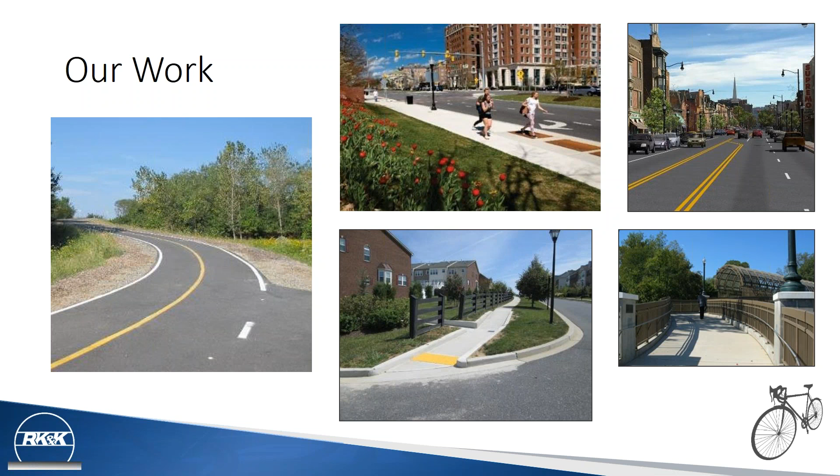So today I put together an agenda where we'll go over some general considerations, what we're looking at as we're planning and designing these bike facilities. We'll discuss some of the trends as we're planning for cyclists. Then we'll go through some design guidance and some examples so we can discuss lessons learned. And then I'll highlight several keys to success that, from my own personal experience, I wanted to share with you today, so you can reflect on those in your practice wherever you may be throughout the Commonwealth.

So first we'll talk about some general considerations. The relevance of this topic can't be overstated. Bike planning is an incredibly popular area of practice. It's one of the areas where we see a lot of interest in design. We're not building as many roads. We are building more trails, cycle tracks, and so forth. So those facilities provide for general interests of our community.

So active transportation, alternatives. These facilities allow us to enhance transit, expand the reach that transit is serving our communities. It provides environmental benefits because it is an alternative for transportation. So people might decide they're not going to take their car, but they'll go out on a bike.

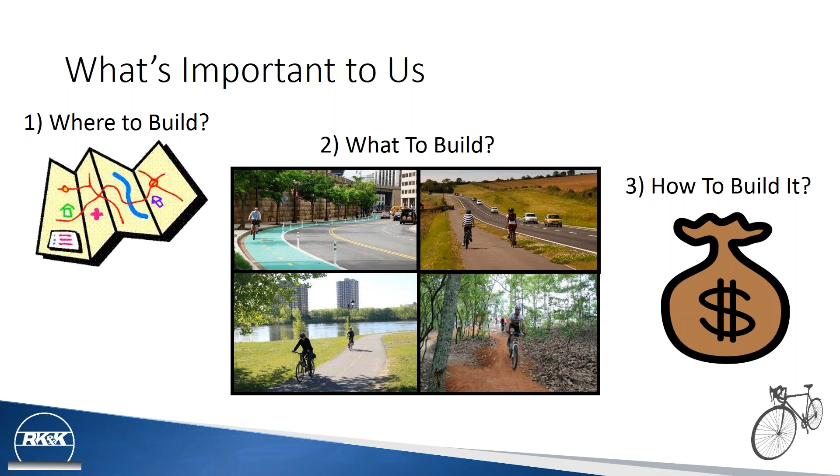Why is this topic important to us? As we're planning and designing these facilities, it's important that we think about where we're going to build, and we also think about what we're going to build and how we're going to build it. At the end of the day, that really boils down to what's the bottom line. How are we going to finance these projects? Because despite having the best plans and knowing exactly what we're going to build, we do have to make sure that there's adequate money to construct these facilities and then ultimately to maintain those. So we'll cover some aspects of this throughout the presentation.

Who's our audience? Who are we working to serve? So that's a variety of folks. We know that our direct impact is going to be the cyclists who are out there riding on these facilities. But there are also indirect impacts, and we need to keep that in mind as we're working on bike projects. So that includes property owners, the people who may be impacted because a new facility is located adjacent to or on their property if we need right-of-way. We've also got road users who are going to be around these cyclists, so we need to keep their expectations in mind.

There are businesses, so these facilities may serve businesses. They may provide accessibility so people can go out and shop at businesses or even commute to an office. And then another consideration is tourism. Cycle tourism is a field that we recognize a lot of folks practice, and it's emerging as an area of interest to capture cyclists in your community.

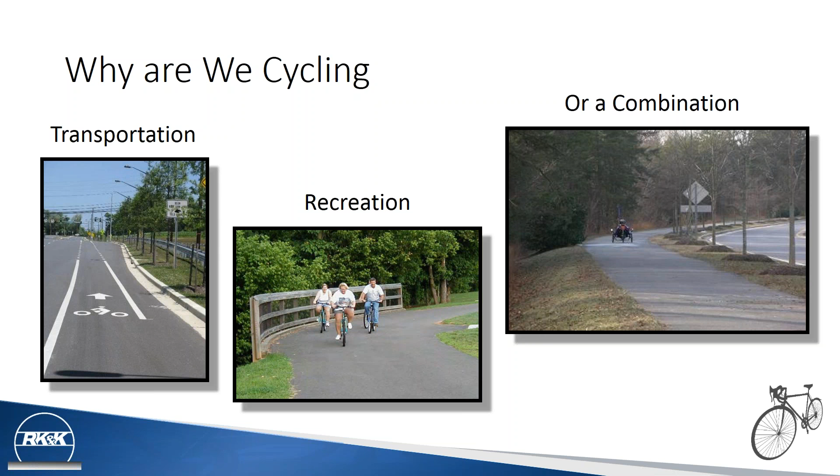But the facilities, whether transportation or recreational, may serve a combination of benefits. So it's really important to think about who you are trying to serve as you're planning a new facility. Is it going to serve a transportation purpose where it's more direct? Is it recreational where it may just be for somebody to go out and enjoy? Or do we need to make sure that we meet those combined needs? So that's something to keep in mind.

Now, in terms of mode share, we know from recent research that roughly half of our bike trips are recreational. That number has been decreasing a little bit over the last 10 years or so. And we see that commute trips are a small percentage of our overall cycling trips, but that number has been growing. And we can also see in terms of the increases in cycling that it's becoming more utilitarian.

So people are getting on their bikes so they can ride to shop or go do something other than just a recreational purpose: commuting to work, shopping, visiting businesses, that sort of thing. So as people are out there biking more, we're trying to meet their needs, get them where they need to go.

Then you've got the enthusiastic, confident rider who is generally also going to be out on the roads. They're generally going to ride regardless of conditions. They may be a little bit more apprehensive about the most challenging environments, but they're still going to be out on the road. They make up a small percentage, less than 10% of our overall bike users. And for as long as we have been designing and planning facilities, that's the group that's generally been catered to from the engineering perspective.

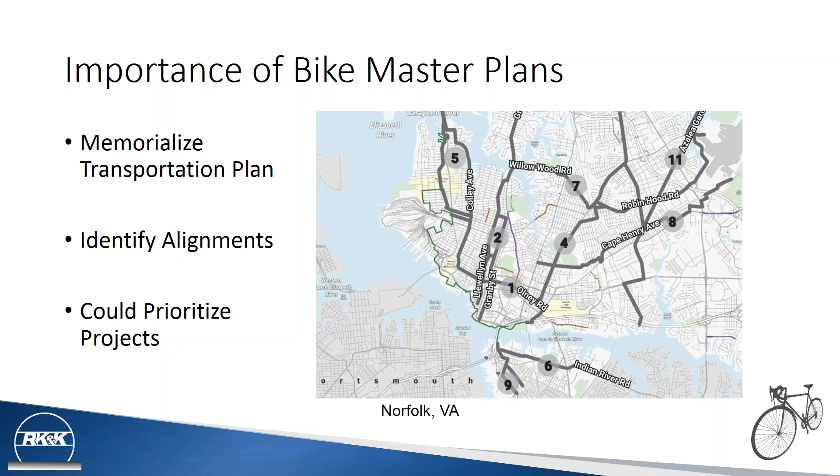So the example here from Norfolk, it includes a number of alignments and where those alignments could be developed. So having that plan helps Norfolk determine what it is they're going to build. They can use the plan to prioritize when projects should move forward. So those are critical considerations, and we'll touch on this a little bit more in just a bit.

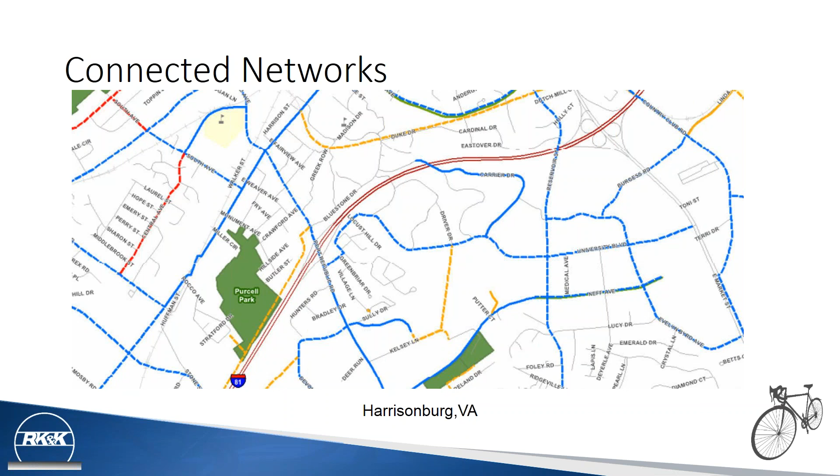Another important theme that we're discussing a lot in the bike planning community is connected networks. So we all recognize that these lines on our master plans don't just build themselves. So we have these segments that are existing, but we've got a lot of pieces of the puzzle that don't connect. And so what we say essentially when we're developing these plans, it's like we're saying to our cyclists, when they're going from an existing facility to another and it's connected by a dashed line, that's like saying good luck. But the goal is that we fill in these gaps, and we want to prioritize those missing links to make it easier for people to connect their route, to make it safer.

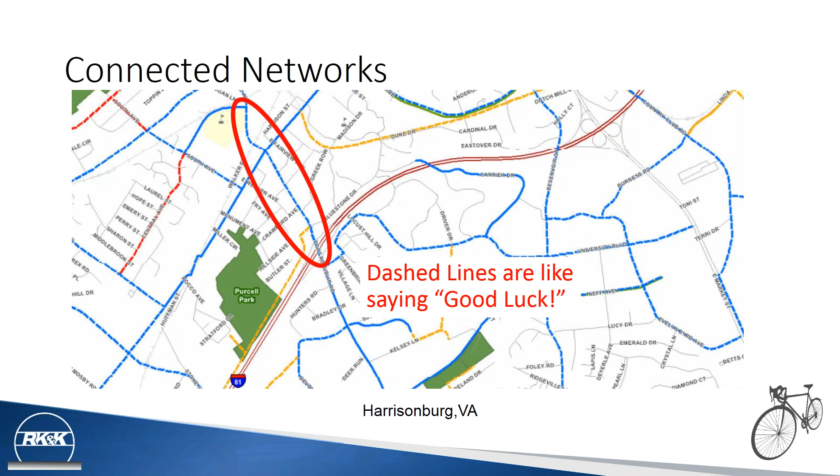The example here from Harrisonburg, as far as I could tell, these bike lanes that I've circled have been constructed. So now if you want to ride from one point to the other along those two solid lines, the dashed line in between has been connected. So that's a theme that we're not trying to have little bits and pieces that are disconnected throughout our communities. We want to actually create a network. We're seeing that in some communities where they come into a downtown and they do 5 or 6 projects on a network basis, and those projects are on the ground all at the same time. So connected networks is a big theme that we're hearing.

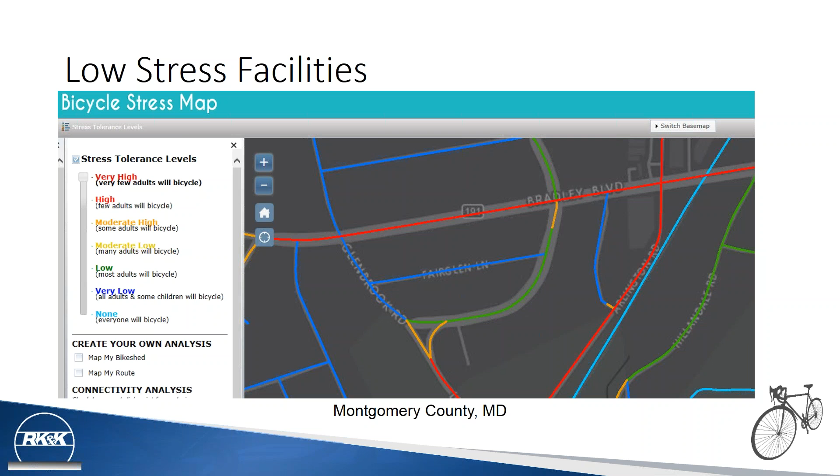Another theme that we hear a lot about is safety and security, and if you've worked on bike projects, you've definitely heard that concern raised at some point. Some considerations that we hear about: lighting. Lighting is a big issue in terms of security. We want to make sure that you can see at night. It makes it more accessible.

It's more of a transportation type of component of a project. So whenever we're doing a transportation bike facility, we're looking at including lighting. It is a very expensive facility, so that is a consideration that you have to have as you're planning that facility to include lighting and be a 24/7 transportation link.

Other factors that people might look at are cameras, maybe some patrols, either police or volunteer, and then including mile markers is a very valuable tool to riders because it allows them to identify their location if they need to call in the event of an emergency. It also might make a good meeting point for people as they're out on the trail to say, I'll meet you at mile marker 50, and so it's another good asset to include.

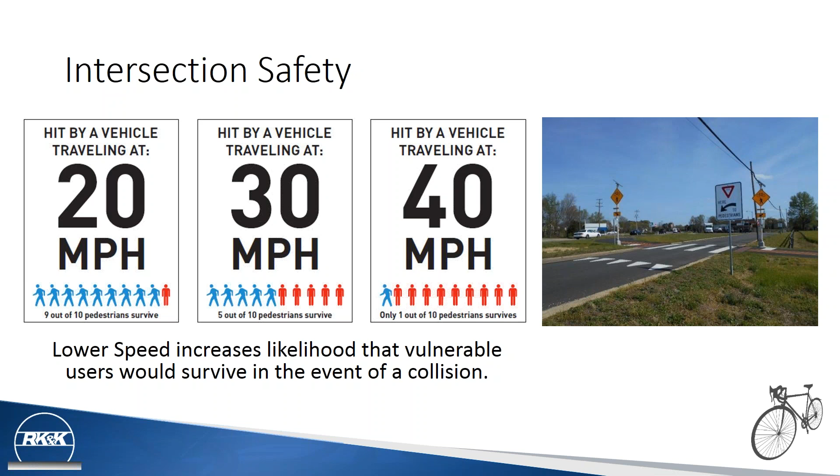So our goal is anywhere that we are intersecting with an existing road, we want to make sure that we identify that point, make sure that people see what is going on from the car, and identify that the bicyclist is going to be crossing the street, hopefully with some sort of an active warning device, but at minimum with signage and marking, so we can improve safety at that intersection, decrease the likelihood of a collision, and then anything we can do to reduce speeds at those points will also decrease the likelihood that they'll be severely injured in the event that a collision should occur.

So I want to cover a little bit of design guidance. Hopefully everybody on today's webinar is familiar with these examples, but we'll cover some of the more emerging guidance and talk about the context that we look at it as designers. And then we'll also go through some examples so I can touch on some lessons learned and highlight some of the challenges and opportunities that we see on our projects.

Then in terms of general guidelines, we have our federal guidelines that everybody's familiar with. Some people hate some of the standards that are in here. I won't get into too many of those details, but just to highlight what we look at in terms of engineering these facilities. So the Green Book, A Policy on Geometric Design of Highways and Streets, is an overview of design of roads, and it also includes some bike facility guidelines, but the more specific AASHTO guidance is in the Guide for the Development of Bicycle Facilities 2012, or the 4th edition.

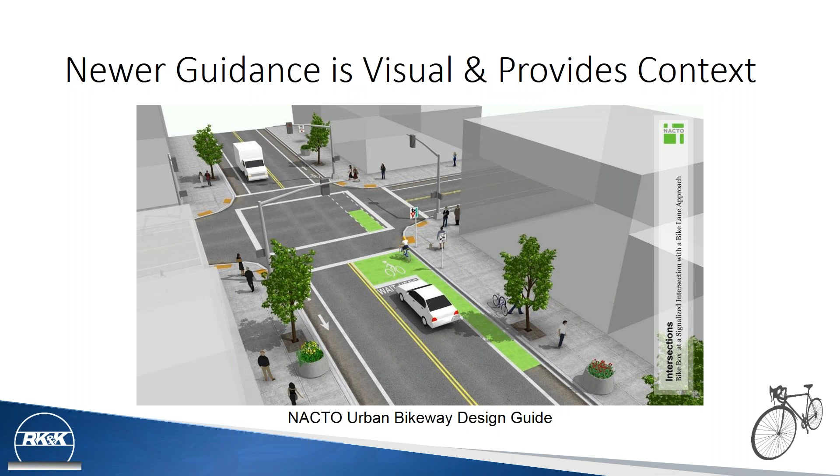Just to give everybody an idea of what these guides look like, the newer guidance, again, is visual. It provides context. It doesn't just show a facility like a bike lane approaching an intersection. It shows the intersection. It has signage and the people. So what you're going to see as you look through these guides is a much better representation of what those facilities are going to look like when they're constructed. It's also going to provide you with an overview of how different facility types might interface.

So when we use the old federal guidelines, we'd have to put together that information based on our own experience, engineering judgment, and we would also have to piece together different components of the design throughout the guides. Now we have guides that show how different facilities might interface with each other on an intersection or corridor basis.

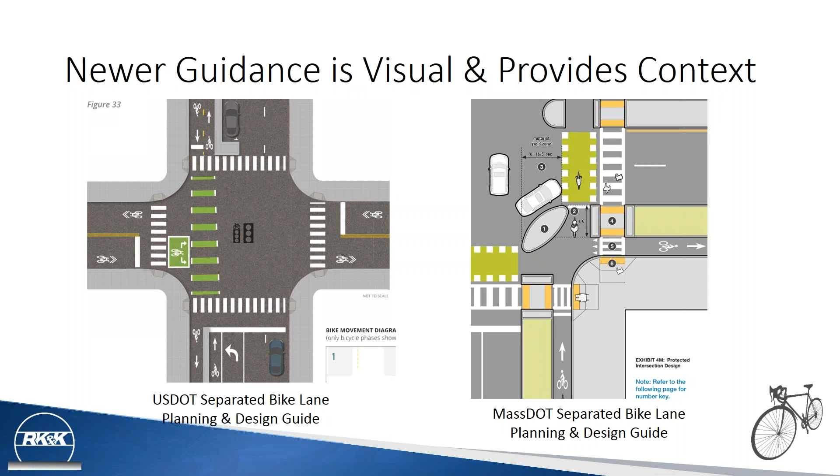So again, these are really great guides to help us depict that information, pick apart how we might complete a design, and you can even see some differences, like whether they use dashed green paint versus a solid green paint from left to right. So there are variations that we might apply as we're completing a design.

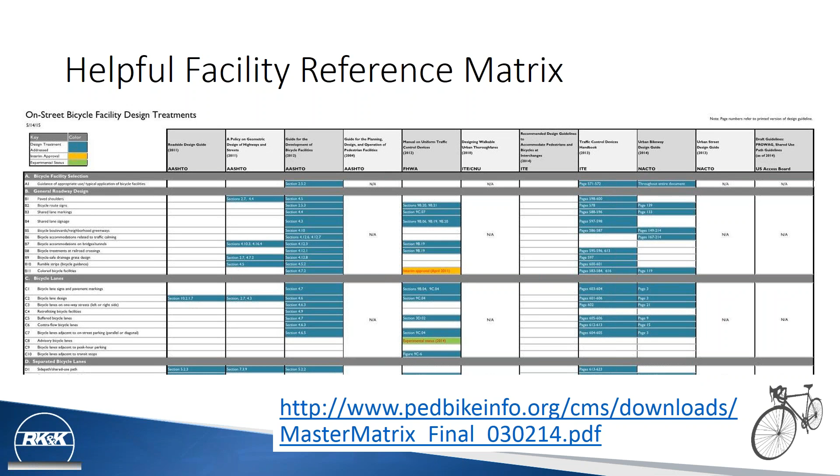So if you're reviewing a plan or developing a plan, this is a good thing to have on your desk so you can quickly flip to the pages that are relevant to whatever facility type. Make sure it's being designed appropriately. Make sure nothing's missing. The only caveat that I'll add is that this hasn't been updated recently, and there are some more recent guidelines that have been put out. So you still will have to do a little digging through the index if you're referencing one of the newer manuals, and hopefully there's a plan to update this matrix at some point to incorporate those more recent guidelines.

One of the themes that I did want to highlight is FHWA support for design flexibility. So we discussed these federal guidelines and standards, and then we have all this new and emerging guidance that's come out. So this memorandum that was published in 2013 essentially said, yes, we acknowledge that AASHTO is the standard. It's what we use as our primary reference, and the same for MUTCD. But designers should reference NACTO, they should reference ITE, and these other guides that have come out.

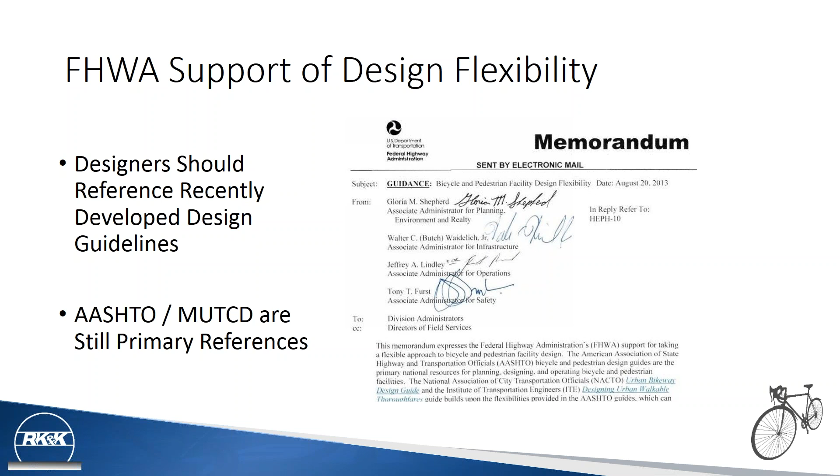So essentially what we're saying is, as a designer, as you're working on a new project, you shouldn't say, well, I can't use this facility type because it's not in the MUTCD. You need to reference the MUTCD and look at the other guidelines and see how they all fit together, so you can incorporate different elements of design that may not be clearly spelled out in the federal guidelines but are allowable. So it allows us essentially as designers to say, yes, NACTO is applicable, and here's how it fits into the overall design practice. There are some caveats to that, but in general, it just allows us to be a bit more robust with our research as we're putting together a design.

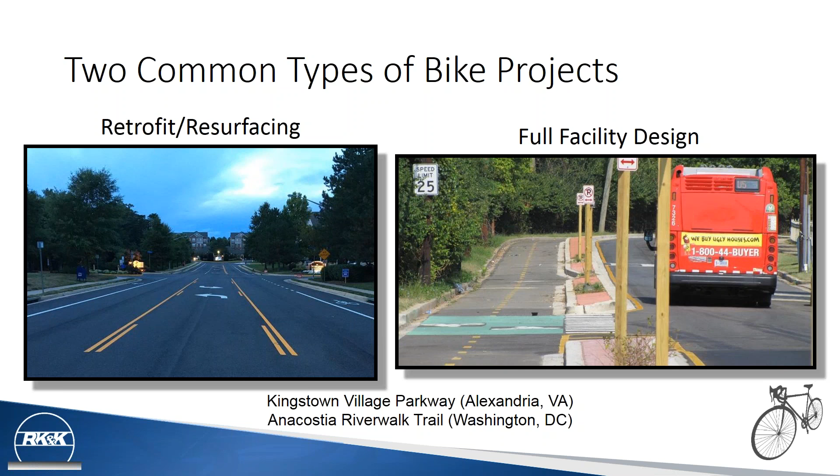So there are some challenges and opportunities with both, and in a full facility design, you may actually be constructing. But the theme here is that a retrofit means we're pretty much just using the existing road, where the full facility design means we're building something new with concrete, asphalt, that sort of thing.

So some of the challenges to those projects. In a retrofit project, we have competing interests between modes, so we're not building anything new. That may make it a little bit challenging to fit everything into the existing palette, if you will. We have conflict points that we may not be able to work out because we can't create new space. Typical challenge on any bike project is parking, and if you've worked in bike design at all, you'll definitely run across that issue. And then generally on a retrofit basis, there's going to be higher traffic stress, so we don't often have a lot of space to make for these new facilities.

On the full facility design side, challenges that are pretty common: utilities, right-of-way, challenging environments, and then we are now required to do stormwater management. All of these generally trickle down to cost. When you're building things new, the cost is generally going to be significantly higher.

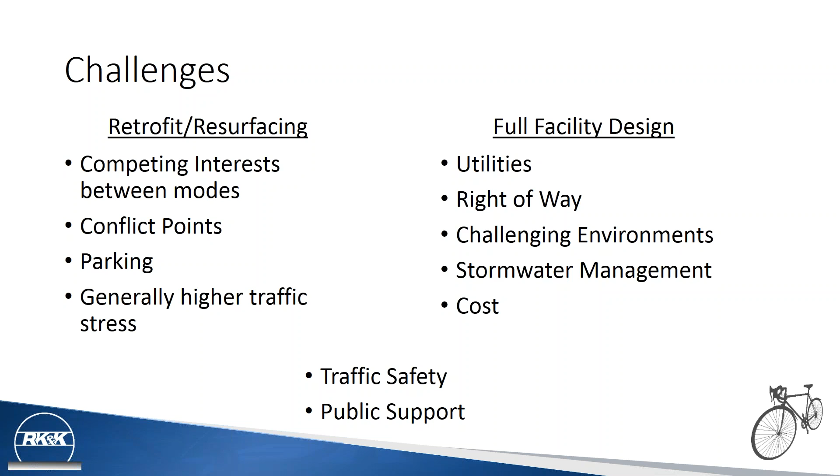And then common challenges between the two: traffic safety, we want to make these facilities as safe as possible, and public support. So as we have some competing interests, we may run into a little bit of public opposition. We want to make sure that our design satisfies every user's needs and provides the maximum safety and benefit to our communities. So to highlight some of the challenges, one example that I mentioned already is competing interests.

So here's an example from my ride into the office here in DC, where a project included bike lanes, parking, and 2 travel lanes, but when we get to an intersection where there's a turn lane, there wasn't space to put in a dedicated facility. And so in that case, we've got this turn lane, or is it a bike lane, or is it both? And this is the sort of environment where it's fine for someone who's in that strong, enthusiastic, confident rider type, but it may not capture the users who are a little less confident, who may, at this point, prefer to ride up onto the sidewalk to avoid being out mixing with traffic.

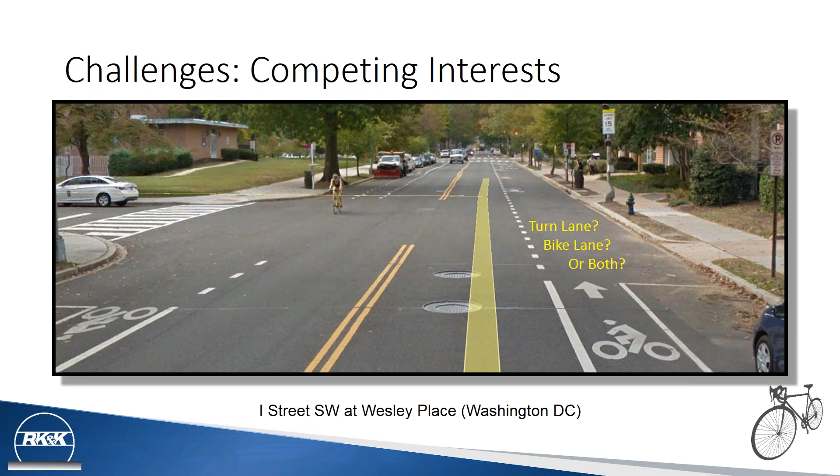And a lot of factors weigh into that. Traffic volumes, speeds, and maybe even the character of the other road users. Is it heavy trucks and buses, or are they passenger cars? So a lot of factors to consider there. We do know how to fix that in terms of cost. It costs more to go in and do the retrofit to physically separate, but just a little guidance to highlight here from the MassDOT separated bike lane planning design guide.

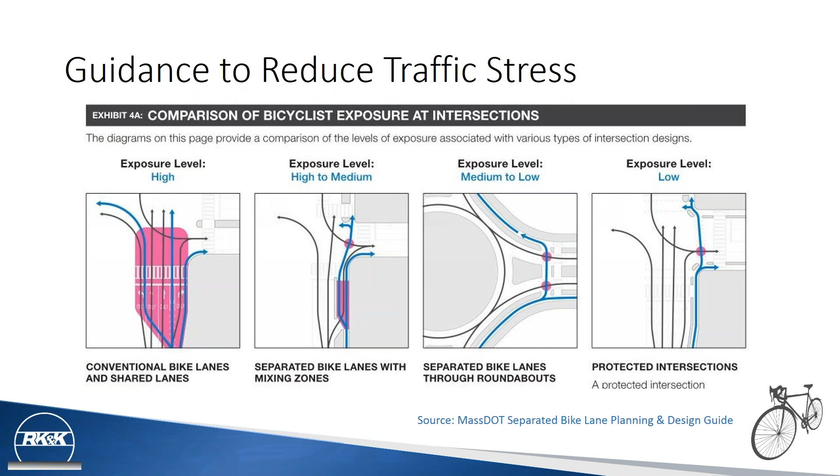We know the exposure level is high when we just have bikers out there on their own, and as we incrementally include means to separate folks, flex posts and curb separated bike lanes and trails, we reduce their exposure, which ultimately improves safety. So it's a balancing act of making sure that we strike the right balance to improve the facility, make it safe, and use the space the best that we can.

Another challenge that's very common on projects, especially when we're working outside the roadway, is right-of-way and utilities. This example comes from Montgomery County. So we may do some engineering to limit our impacts beyond the right-of-way. So we might have to build some walls. It's pretty common when we're doing trail projects. In this example, no buffer was provided, which is an AASHTO minimum for a buffer is 5 feet.

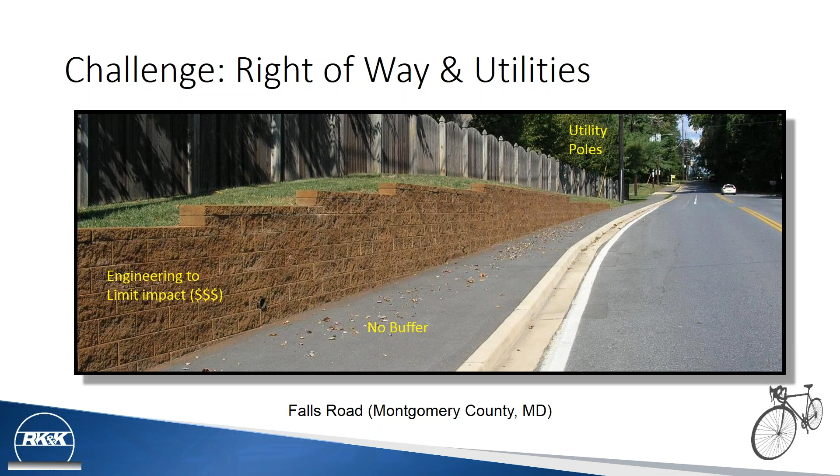So balancing the demands of traffic along with the demands of the cyclist, that can be tough, and sometimes we're doing a design waiver or a design exception that removes some of those features we'd prefer to include. We've also got utility conflicts, might be utility poles like this example. A lot of times they're underground conflicts, so we just have to keep those in mind.

Environmental barriers. So this is the Anacostia Riverwalk Trail in Washington, D.C. In this case, we were working with National Park Service, and it was determined that the best location for this trail was to go out into the river on an elevated boardwalk. So that created with it some floodplain and environmental issues. We also had this bridge, CSX bridge, that we needed to design under.

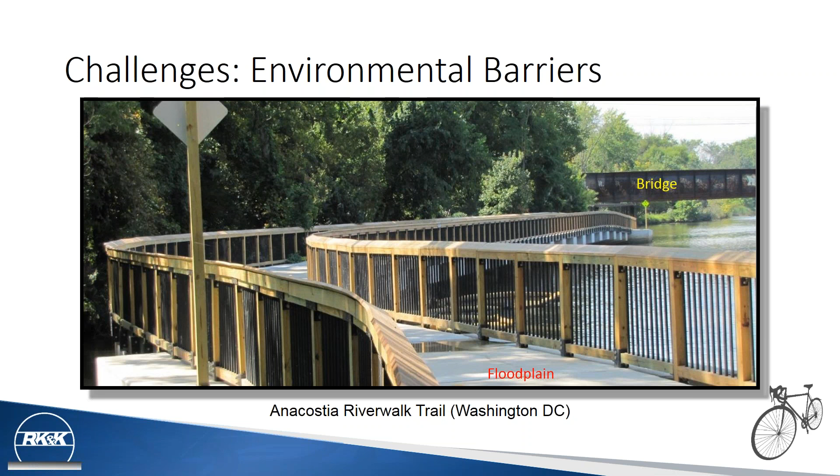So you have to go through a lot of hoops to make these environmental challenges work the way they're supposed to. Building out in the river is definitely a challenging environment, but this was a critical link that it was determined the best location was to go through the river, is most direct, and it ended up being a really great facility.

And in a lot of cases, as we're planning, this may influence the decision to construct a facility on one side of the road or the other based on driveway densities or commercial entrances, even intersecting roadways. So balancing access is incredibly important.

And another challenge is maintenance. So we know that as we build these facilities, there are going to be things out there that we need to address. So debris, leaf removal in the fall. In the winter, we've got snow, and there will be people who are out riding in the winter. We also may have temporary closures, especially if we're talking about on-road facilities. So making sure that your community has standards in place that require a bike detour or some sort of notification when there's a temporary closure of the bike facility. It's pretty important that people are adequately accommodated through work zones.

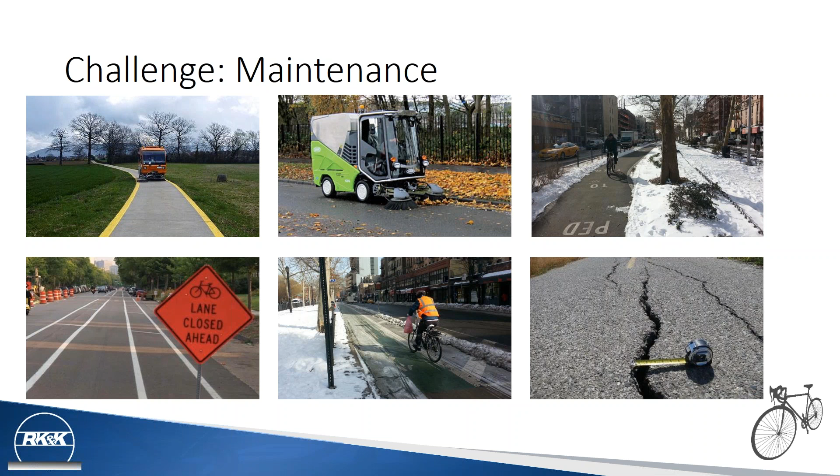And then just in terms of long-term maintenance. So if we put these facilities out there just like any road, they break down over time. If we maintain them, they're going to last longer. But if we don't maintain them, the cost to go in and do repairs will be higher. So those are all considerations that we want to make sure are addressed from an operational perspective.

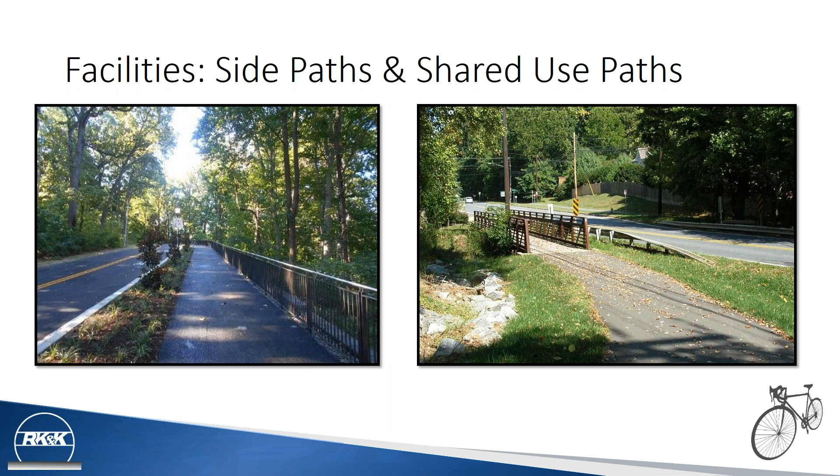So those increase cost and complexity of the project, just some considerations that we see a lot on those types of projects. Trails, again here, highlighting the Anacostia Riverwalk Trail.

These projects, we use the AASHTO guides to look at things like horizontal and vertical alignments, want to make sure that the sight lines are adequate, sign when they're not. So those guidelines are very applicable when we're talking about these sorts of greenway facilities, making sure that people can safely traverse that facility type.

And then as we get into on-street facilities, buffered bike lanes, so we've got a standard buffer, maybe 2 to 3 feet. It is a huge benefit to separate folks from traveling vehicles. Some of the disadvantages here are that cars tend to use bike lanes, and if you add the buffer, it's essentially a travel lane. So there are challenges there that if no physical separation is provided, people are going to tend to use that space, create more conflicts with cyclists when they're on the road. So that's just something to keep in mind as you're looking at different facility types. This example is in Charlottesville, Virginia.

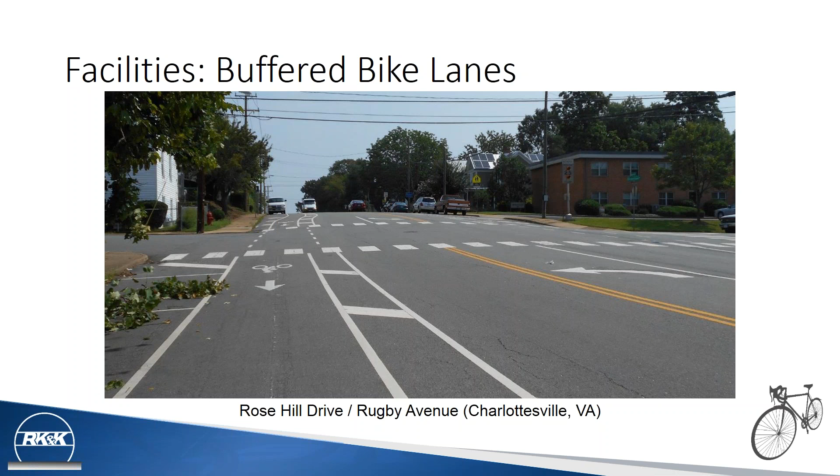So if we're working on that same context where we're building within the existing roadway, we put in the buffer, but we want to enhance that separation, we'll look at using other devices. In the case here, we propose flex posts. This is currently in design. In a project like this, one of the key considerations that we had was snow maintenance.

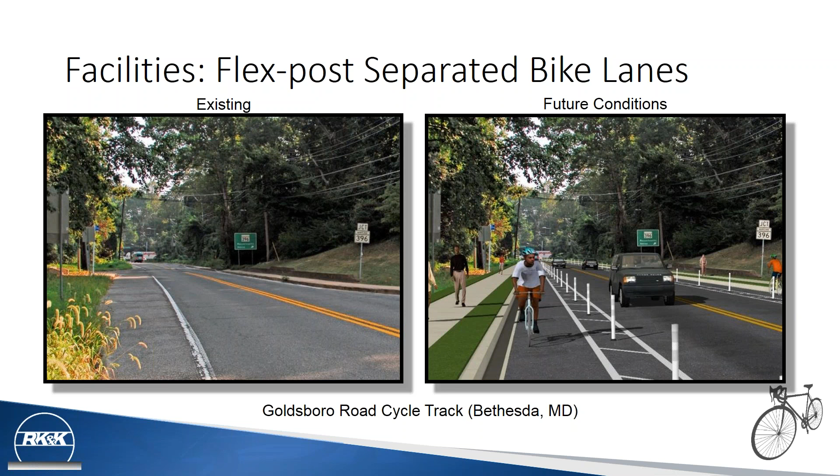So one-way paired cycle tracks on this road, they're too narrow to do snow removal, but the flex posts that we specified are removable. So this facility is actually a buffered bike lane in the winter, allowing the snowplow to clear curb to curb, and then the flex posts would go back in the spring and be there spring through fall for the less confident riders, which sort of matches when we'd expect those users to be out on the road.

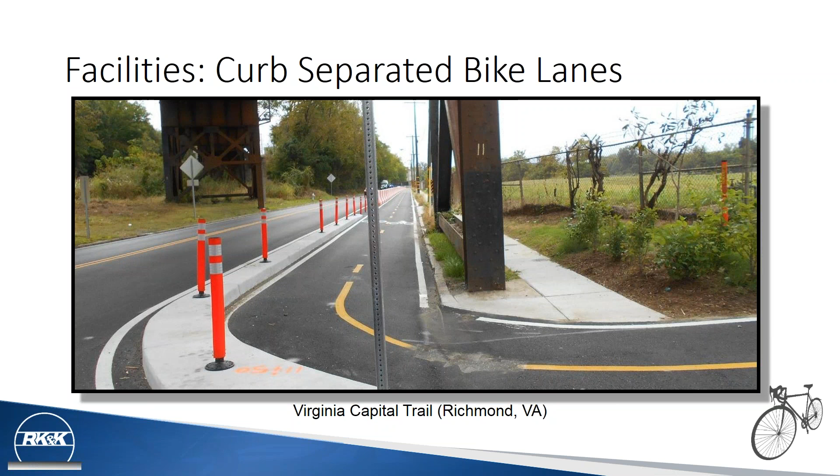And then taking it a step further, curb separated bike lanes. So here we've got a section of the Virginia Capital Trail where it's curb separated along the roadway. This is an interim alignment to detour an issue that we had acquiring right-of-way to go through a property along the river. So in this case, a curb separated bike lane provides good separation for folks along this stretch of road.

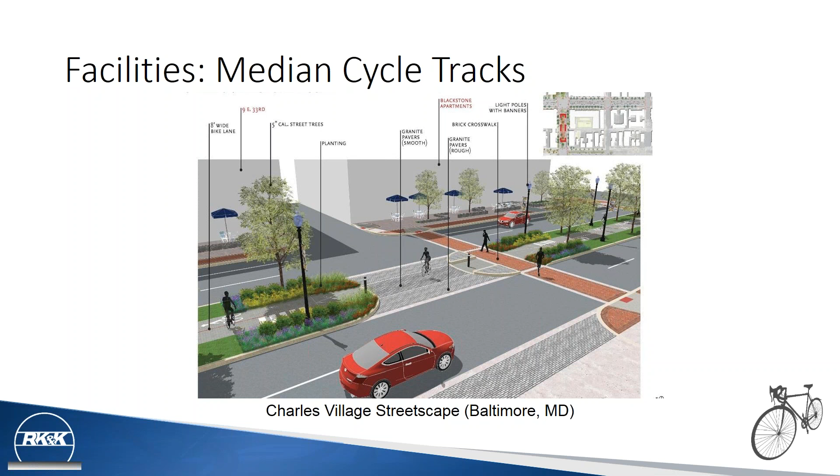A more recent type of facility is a median separated or median located cycle track. This case comes out of Baltimore, a streetscape project we're working on. Great in terms of getting folks along the roadway. We didn't do standard bike lanes because this amenity is more of a park-like setting right in the center of the city. The piece we're doing is only a block, but there are plans to do another mile or so that's in planning through the city, actually through Rails to Trails.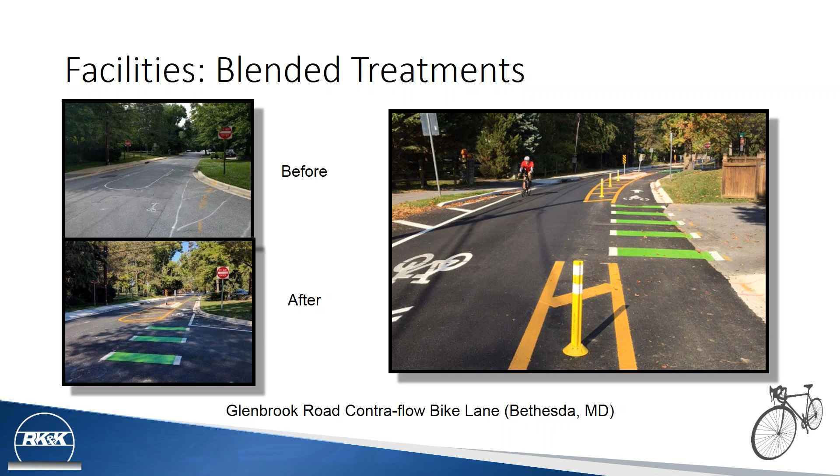So essentially what we did was took this wide, what used to be a two-way street, and installed a cycle facility in one direction, narrowed the lanes, and put in some traffic calming, so it would be a comfortable place for people to ride if they're a more confident cyclist, and then if they were less confident, they can ride on the sidewalk.

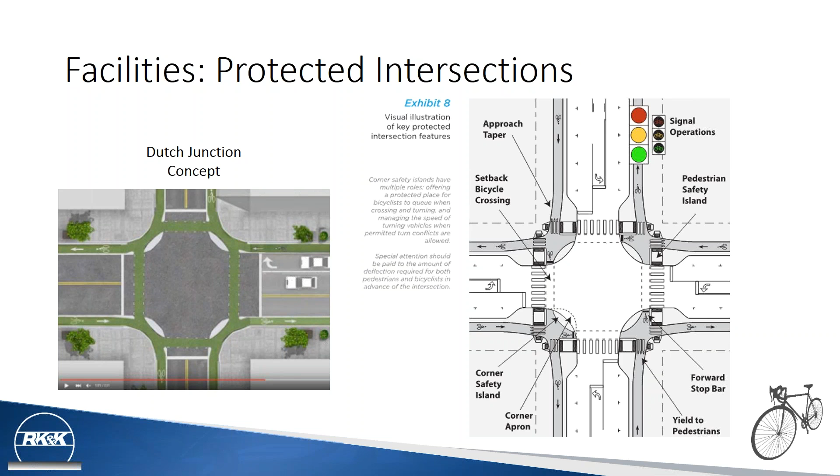Then an emerging facility type that I just wanted to touch on briefly is the protected intersection. We're seeing these pop up around the country. They provide good physical separation for all modes, also might provide signalization. I'm seeing them go in as stop controlled, so very good facility type that allows us to treat intersections, so then different facility types like trails and on-street facilities can be matched up, and it gives us a lot of flexibility to improve safety where people are crossing the road.

Several keys to success I wanted to highlight very briefly for everybody. The first is have a plan. I don't think I could stress that enough. One of the biggest challenges that we see in communities is that the plan is outdated. So even having a plan isn't enough. It's making sure that the plan defines what you want your community to look like. It facilitates incremental implementation of your projects, but one of the big takeaways is it precludes new roadblocks. So people ask a lot about ensuring that a project can be built or constructed.

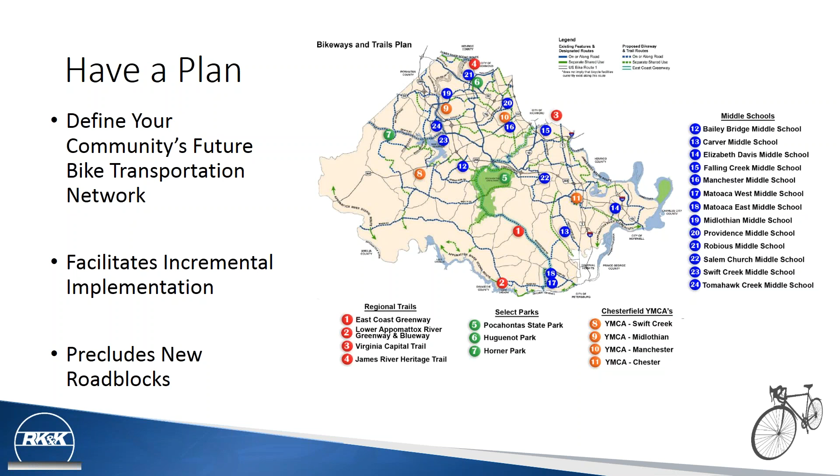What are the teeth that you have as you're going through development review to make sure that adequate right-of-way is set aside when a development comes through, so you can put these facilities in? If it's on a transportation plan, you have something that says we're going to have a trail here or cycle track, and whatever that is, you've at least identified that it's a need that your community has demonstrated, and then that's something that can be incorporated as part of your plan review process.

Another item is funding. Everybody asks about funding, so it's important to recognize opportunities to fund these projects. There are a lot more opportunities, at least currently, to get funding through the government. The FAST Act changed some of the old programs, and it also created some new opportunities. The key point that I wanted to highlight here is total project costs.

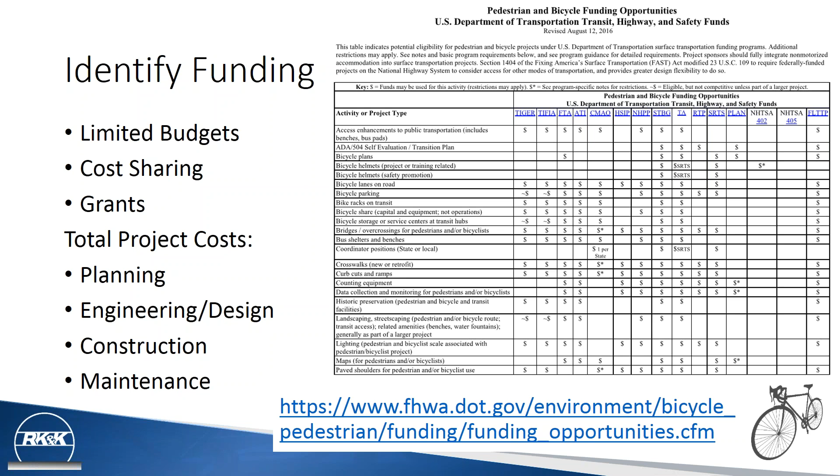So as you're planning to do a project, you have to include the full cost: planning, engineering, design, construction, and then ongoing maintenance. A lot of times projects only consider the construction cost and leave out the engineering, design, and also nothing is set aside for maintenance. So it's really important as these projects move forward to keep that in mind.

Another asset that we have is our local advocates. They are our road users. They're the people who are out riding, so it's really important to engage with them, to listen to what they have to say, because they provide some really great input. And also, as we go through public engagement, they tend to be a partner, but they also are really good at generating interest in projects, or helping us refine them and make them a constructible project that meets the needs of the community.

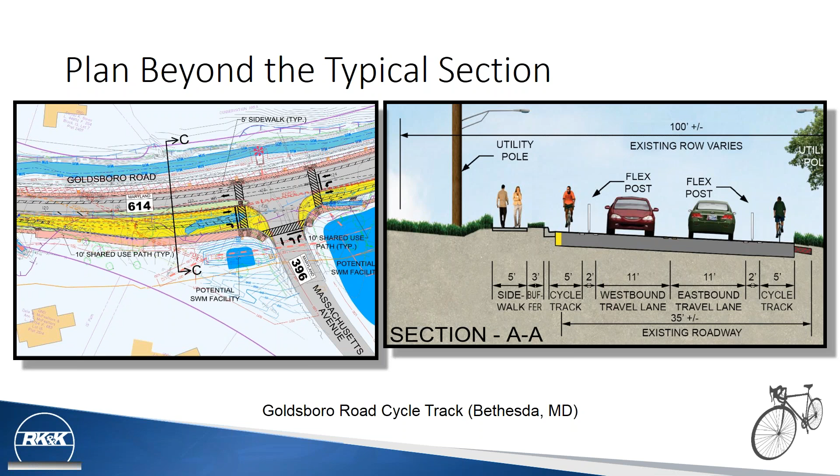Another point that I wanted to bring up, just as planners, we have to think past the typical section. It's very common when we're looking at facilities that we look at them from the typical section. You need to think about what things look like when we get to the intersections, because that's where cyclists tend to get squeezed out, like the example I showed down the street from my office. We want to make sure that as a cyclist you can get through that intersection safely, that adequate accommodations are provided.

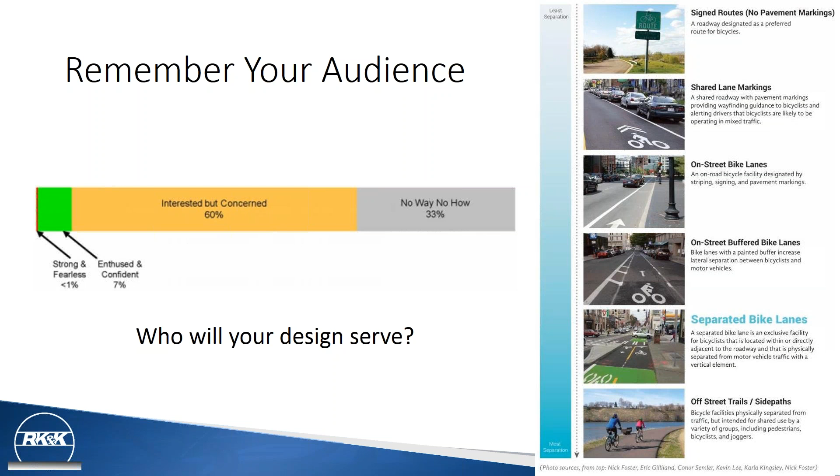And the last thing I'll leave you guys with is remember your audience. If we're planning these facilities for the top 10% of riders, like we've typically done before, we're going to end up with some sharrows, bike lanes, but if we're going to capture the largest group of interested population, we have to think in terms of separation, making sure that the facilities are safe, that they're connected. So just remember who you're building these facilities for, and that'll help generate a much better product.